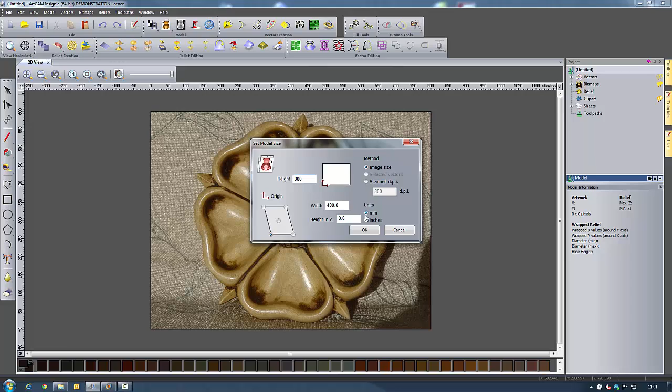So I'm going to go straight over to ArtCAM now, and I'm going to simply drag and drop an image into ArtCAM. I'm going to resize it so it's half the height and width that it was previously, just so it's more manageable, and I've got the origin in the bottom left hand corner, and I'm going to be working in millimeters there. So I'll say OK to that.

You can see that we've got a colour palette down at the bottom with all of these colours making up this one image. Now I'm going to turn the transparency down to start with so it's nice and low, because I'm going to be using this image just as a background so I can start drawing my own vectors from it. I'm going to start by creating the centre of this flower by using a simple circle vector from my vector creation toolbar on the left hand side.

I'm simply going to start in the middle where the cursor changes and drag out a circle. Just zoom in there so you can see that clearly. Now I'm going to input a specific value, radius of 36 millimeters, and say create. Close that down. If I zoom in now, I can actually just tweak the position so it's precisely over the middle of my flower.

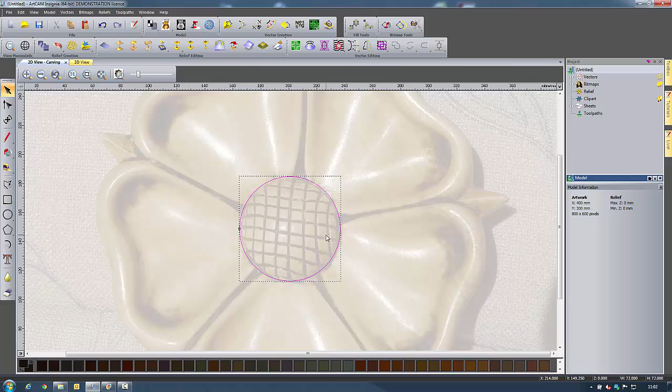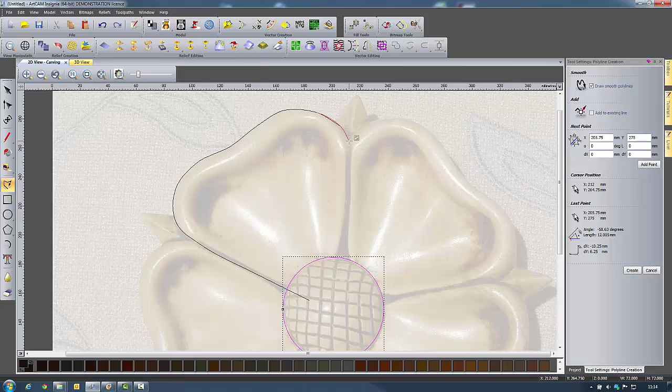Now I want to start creating the vectors for one of my petals. So I'm going to zoom in slightly. I'm going to go to my polyline tool. I'm going to draw smooth polylines. I'm going to start inside the centre of this circle. So we're going to be creating the petal that goes into that circle, and I'm simply going to click around my petal like so, we can trace around that shape. Again, extending into that circle, spacebar to finish.

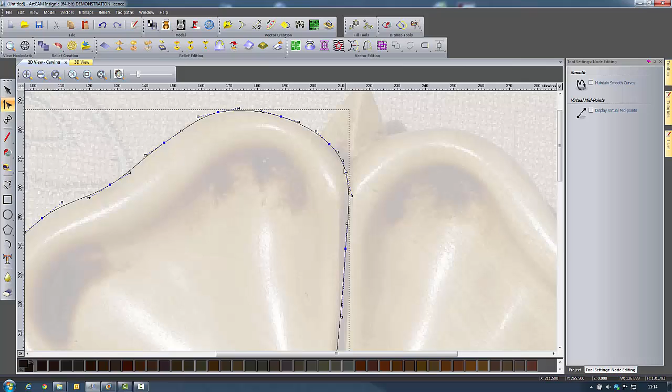If you're not happy with exactly how your vector was created, you can enter node editing and then zoom in and then tweak some of your nodes like so. I'm pretty happy with that. But what I'm going to be using this for is the 2-rail sweep tool, and that means we can't have this dip in the middle here because that's going to be one end of our drive rails. So I'm just going to hover over this node here, press D on the keyboard to delete it. I can also manipulate this one around a little bit as well.

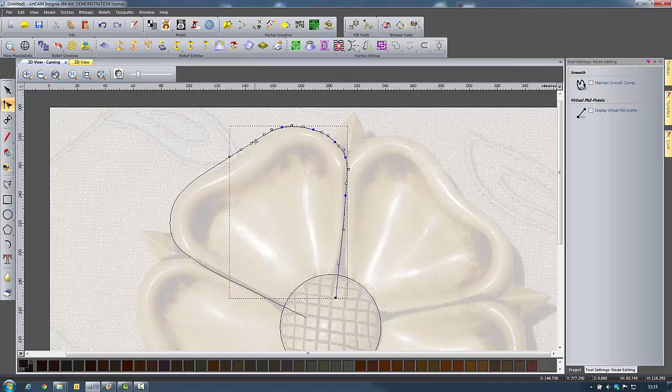So now what I'm going to do is cut these vectors in the middle. So we'll find the middle roughly, hover over and press C on the keyboard, and that means we now have 2 vectors created. So I'm going to exit the node editing mode. I want to create copies of these 2 vectors. So I can shift select them both. I'm going to enter the transform tool, and I want to rotate to copy them around my model, like so.

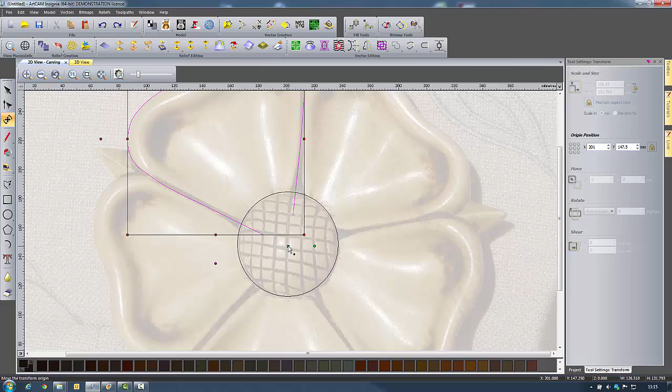Now at the moment, if I just twizzle that around, you can see the pivot point is in the centre of those 2 vectors. So I'm going to undo that, go back to my transform tool, and I'm going to move that pivot point and snap it to my circle centre. You see how it snaps there? My cursor changes and it's in the centre. So now I can create copies. I can hold down my control key to drag out a copy like so. And again, I'm going to create multiple copies so we have petals going all the way around my model.

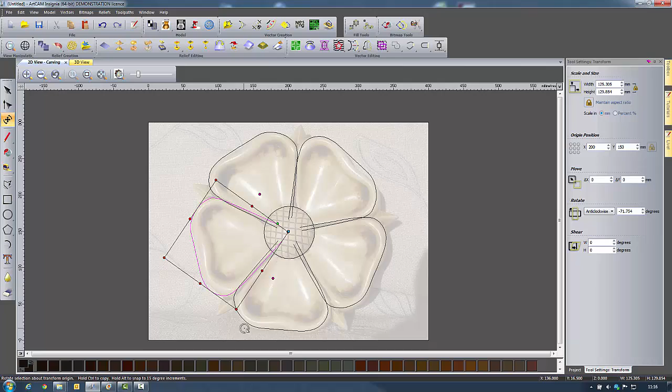Like so. So now I've done this, like I said, I'm going to be using 2-rail sweep, so we need to have cross sections in there. So I'm going to create these next. I'm going to start by creating just a simple rectangle. I'm going to zoom into a blank area of my model. I'm going to create a nice long thin rectangle like so. Say create, and then we'll close that down.

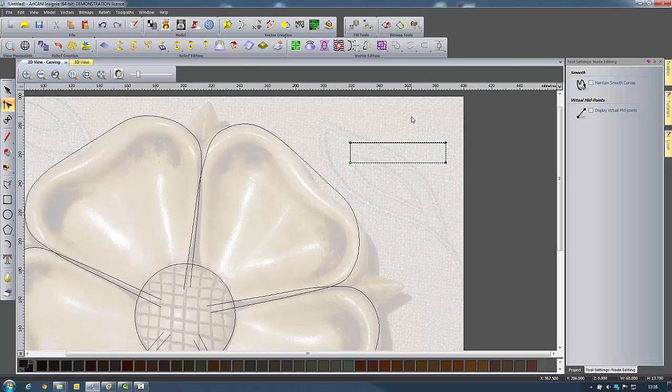I'm going to enter node editing. So we can do that by pressing N on the keyboard, hover over these two nodes, and we'll smooth those out like so. Now I'm going to move them inwards slightly, so we've got a nice straight span up there.

We'll also tuck these in a little bit as well. Now I'm going to enter a midpoint, so I can do this by hovering over and pressing M on the keyboard. I'm going to select this guy and move it down manually. Since I've got something that looks a bit like this and I'm happy, I can then cut this vector, so I can press C and C, and delete this span.

I'm going to go back to normal mode and create a copy of this vector in order to create my second cross section. So I'm going to drag out a copy like so, go back to node editing, so N on the keyboard. I'm going to add a couple more midpoints in, pressing M, and I'm going to grab all three of these middle points and drag them down.

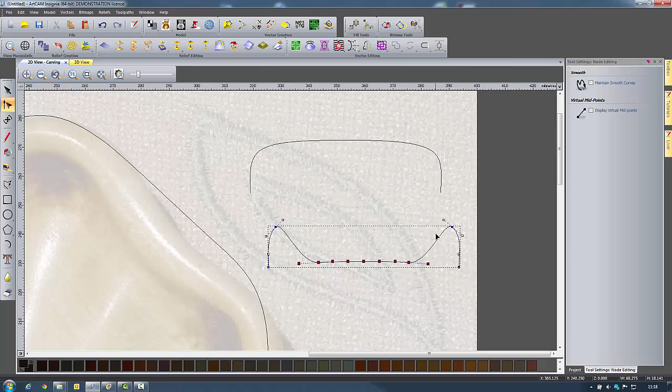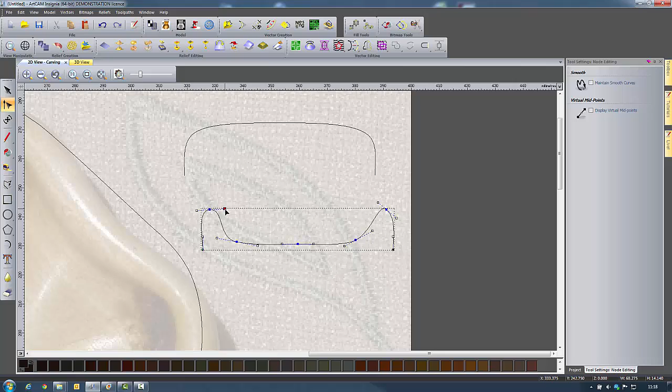Okay, so what I'm doing here, if I just bring the transparency back, is trying to create these two shapes in here. So we've got a nice bulbous end, but we've got a dip shape in the middle. And obviously I'm just using it as a guide. So I'm going to manipulate my nodes so I get the shape that I want. We've got some nice round tops there. And once you've got something that looks a bit like that, that's going to be okay.

The reason I started by creating a rectangle is so these are going to be on a horizontal plane. So I could have used a guide as well. So you see that, like so.

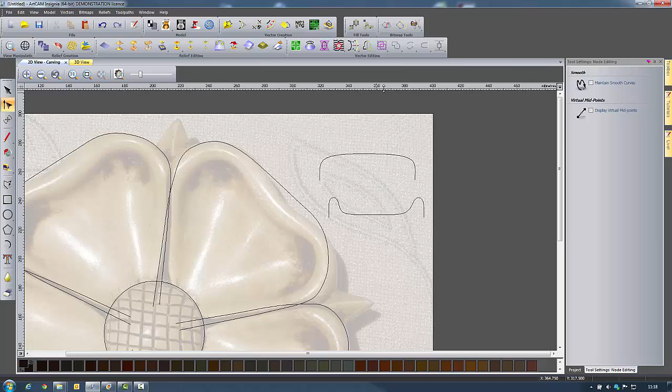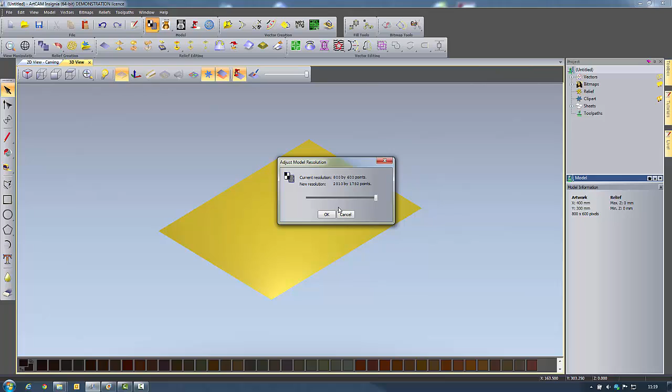So before I start creating my relief by using the 2 rail sweep functionality, I'm going to increase my resolution. So I can do this by holding down this icon here, and we can see we've got a current resolution of 800 by 600 points. I'm going to drag that up to as high as my machine can handle, so that's all the way up to the top, and that's going to give you a better quality relief. We get this warning, are you sure you wish to continue? Yes.

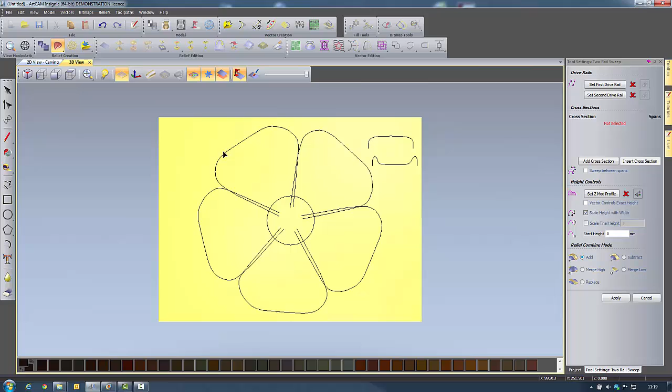I'm in the 3D view, show my vectors. I'm going to view from the top, and I'm going to open up the 2 rail sweep tool, which is this top one here. So it's asking me to set a first drive rail, second drive rail, and then some cross sections. So I'm going to work on my first petal first of all. I can select this vector and set it as my first drive rail, this vector as my second drive rail, and then we can have our cross sections. So I'm going to start with this guy.

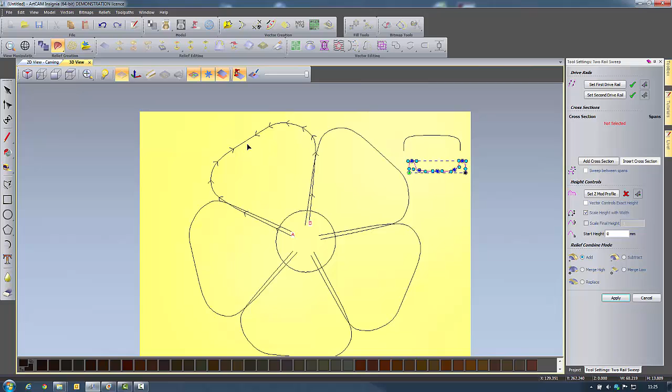And when I click away, you can see that the flow of my vector is going all the way around. So I'm going to reverse my second drive rail, like so, in order to create the start profile here and then the end profile here. So here's my start profile, and I'm going to say add, select my end profile and say add, and then it will get added at the end.

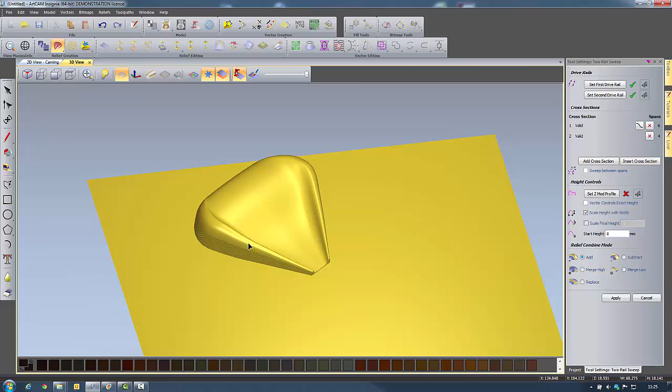We can inspect this relief if we want to. I'll turn the vector visibility off, and we've got a nice looking shape here. But it's not exactly what we want. We want to have more of a bowl-like shape in here and then a bulbous end. So we'll view from the top and show our vector visibility again.

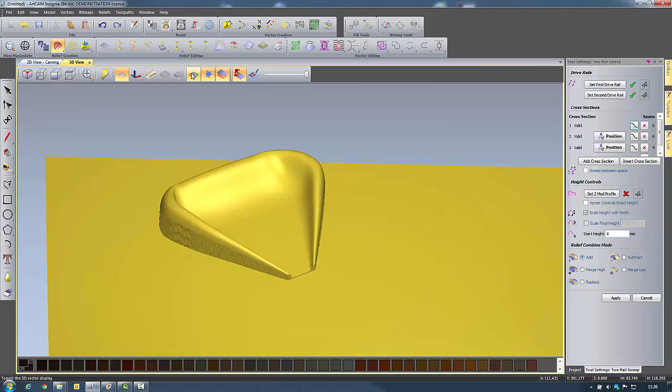I'm going to select my first cross section again and insert cross section, and now I have to input 2 points on my first drive rail, then my second drive rail. It's just a position, and you can see how that updates and changes our relief. So now I'm going to select my second cross section. We'll insert, and then we're just going to do 2 clicks right at the end, and again you can see how that affects our relief. So I'll toggle vector visibility off, and we can inspect that.

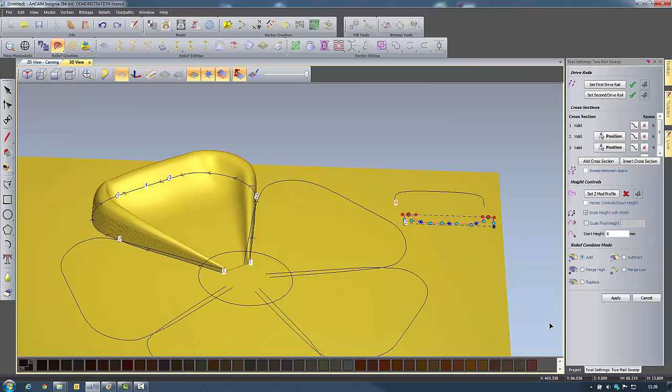If I bring it back on, you can see that we might want to reduce the height of these lips here, and we can actually do that interactively. So if I select my first cross section, I can select these high nodes here and simply move them down, and you can see we've got an update there, and that looks much better. Now I'm going to say add and apply, and we'll close that down. View from the top, turn our vector visibility off, inspect your petal.

Once you're happy with everything that you've got, you can start creating the rest of your petals. So I'm going to do that now. I've just lost my project panel here, which is probably quite useful. So if you do close that down by accident, you can bring it back by right-clicking in this dark grey area here, and then bringing back the project panel like so. And we're going to need this later on. We've got our vector layers, bitmap layers in there, and our reliefs and clip arts and whatnot.

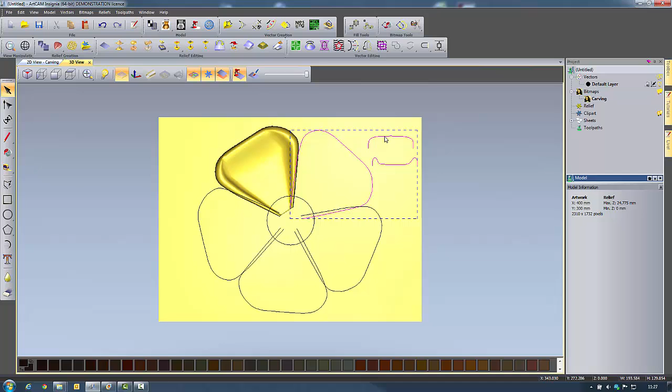So I'm going to create my next 2-rail sweep, and I'm going to do this slightly differently but quicker. I'm going to click on my first drive rail, hold down my shift key, second drive rail. Then I need to shift select my 2 cross sections in the correct order, and you can see our relief is created. Now because we haven't reversed our second drive rail yet, our relief looks quite strange, so we can just reverse that and then we get the design that we're after.

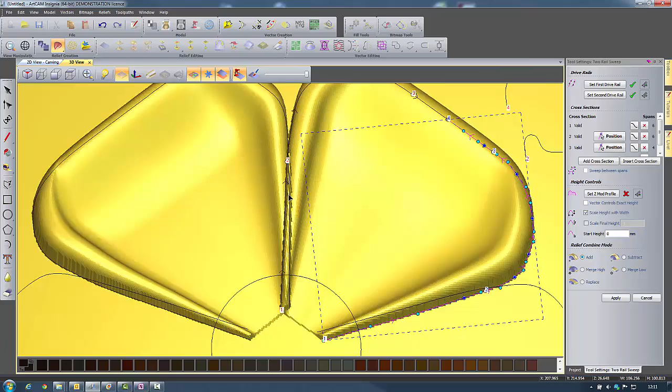So I view from the top, and now I want to insert my 2 cross sections. And one at the end there. And once you're happy, you can zoom in, inspect your relief. You can see that we've got this funny looking lip here, if I just hide my vectors. And that's because we've got add as the combine mode. So what we want to change it to is merge high. And you can see that blends those 2 reliefs in nicely together, and then we can say apply, and we'll close that down.

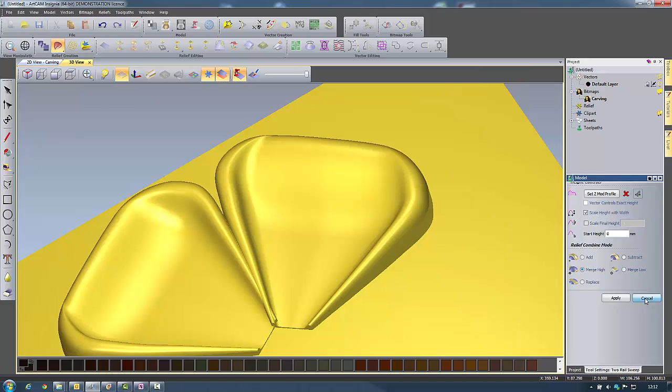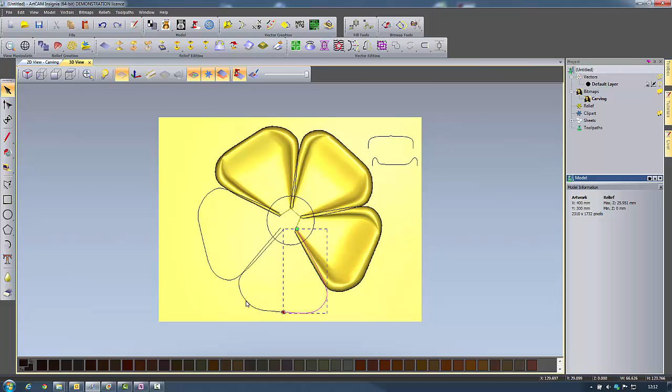So now I want to create the other 2 very quickly. I can simply, first of all, select all of the second vectors and then right click and reverse vectors, and that means I'm not going to have to reverse them inside the 2-rail sweep tool. Now I'm just going to select them all in order, open up the 2-rail sweep tool, and then input my cross sections. So when you've done that, you can inspect your petals.

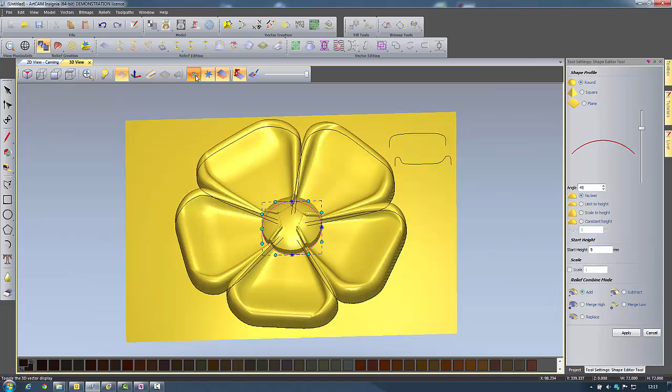But next what we want to do is create a shape for the middle of our flower. So I'm going to open up the shape editor. I want to create a round shape with a start height of 9 millimeters. And if I zoom in again and inspect, you can see that we've got add as our combine mode, and that's the undesired effect. So if I change that to merge high, you can see that all blends in nicely, and we can say apply and close that down.

Now the next thing I want to do is add a texture on top of my flower. If I go back to my 2D view, you can see that we've got a nice texture there where the seeds would be in the flower. Go back to my 3D, turn my vector layers on. You can see that I've got the circle vector selected, and then I can simply go to texture relief. I want to create a texture inside the selected vector. I want a pyramid shape and a sizing of 5 millimeters, and then we'll just say add. And you can see that's added inside that selected vector, and close.

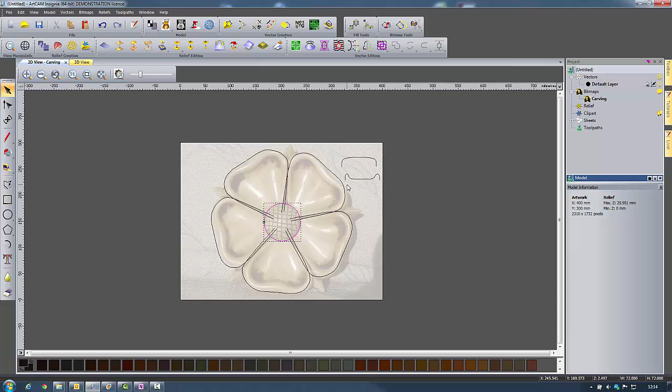The next thing that I want to do is create the leaves. So we go back to our 2D image, turn up the transparency, where you can see we've got these leaves up here, just to complete the flower. So back on the 3D view, I'm going to create a new vector layer for these leaf vectors, and I'm going to rename it leaf and apply. So I can turn the visibility of default layer off, and then I'm going to create a polyline.

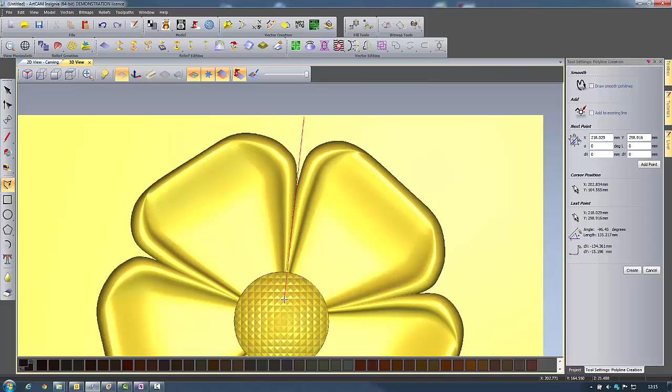So I want to create a straight polyline. I'll zoom into this top area here, and I want to draw a straight line down the middle going straight into that circle vector. Spacebar to finish your line, and then I can just create another one. So if I turn on the visibility of my image in this 3D view, I can use it as a guide to creating these points here. So I'm making a sort of kite shape.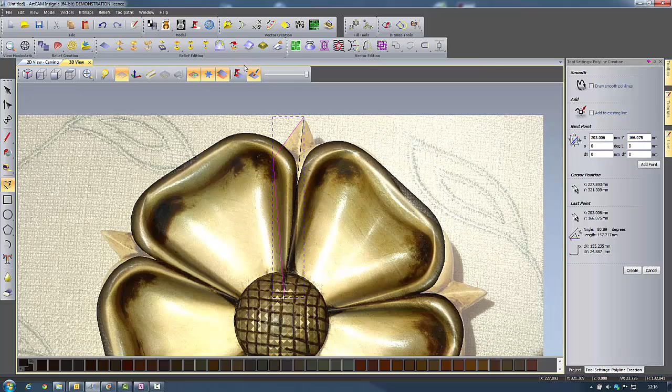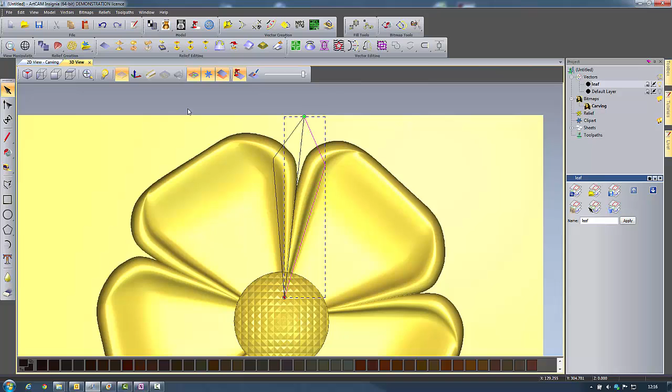Spacebar to finish. Again, you can turn the transparency all the way down, or just toggle back onto the modelling colour. Now I'm going to mirror this vector over this line, so I can shift select the line, mirror vector in selected line, like so. Once I've done that, I'm going to have to create another 4 copies of it. So I'm going to do this the same way I did the petal originally.

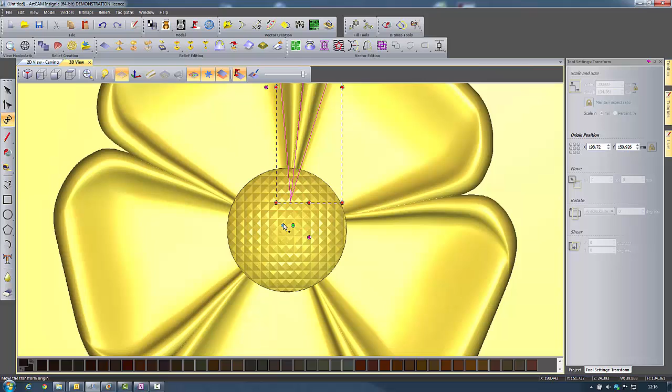Go into my transform tool. I can snap the pivot point to the centre of my circle. Might be easier if I'm a bit more zoomed in there. You can see my cursor changes when I get to the middle of my circle. And then I'm going to hold down my control key and simply create a copy there. And again.

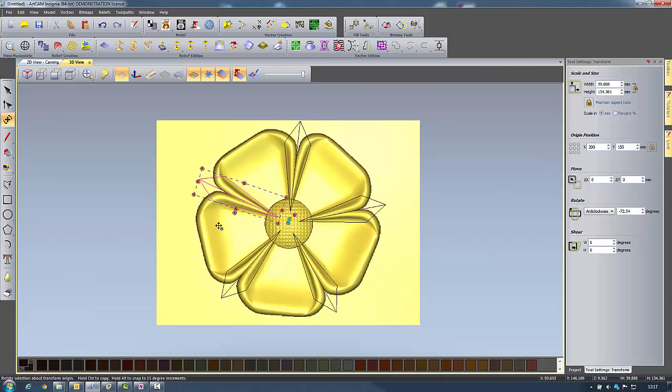And now I've got 5 of those leaf shapes. So I'm going to do this by creating a 2-rail sweep again, so I need to have 2 cross sections.

I'm going to create a polygon, a triangle actually, which is a polygon with 3 sides, and say create. Then I'll go into node editing by pressing N on the keyboard, and cut out this bottom section by hovering over the node and pressing C. Then I can simply move that straight span down, like so. So these are my 2 cross sections.

I'm going to go into my 2-rail sweep tool. I can set my first drive rail, my second drive rail. You can see that the vectors are flowing in the correct direction. This is the start where I want my point to be, so I can select my triangle point and say add, then select my flat plane and add.

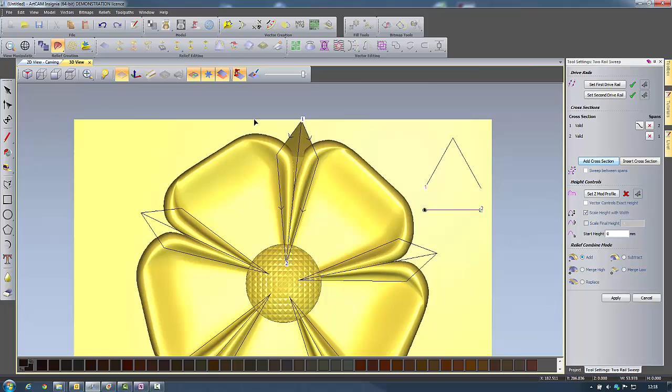Now I'm going to have to go in and add another cross section, as this is protruding too high up above my flower. So I'm going to insert a cross section and simply add one in there, and then I can turn my vectors off and inspect that. That's much better. So I'm going to say merge high and apply.

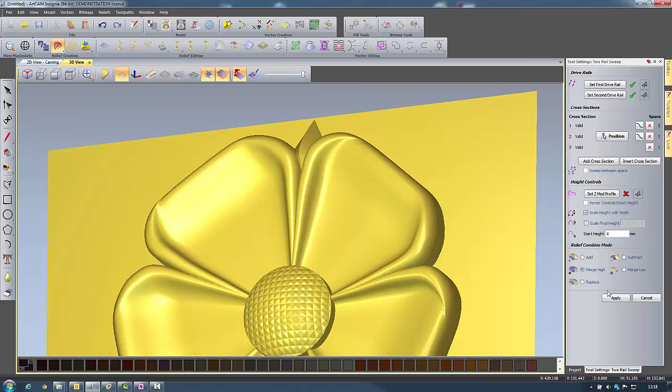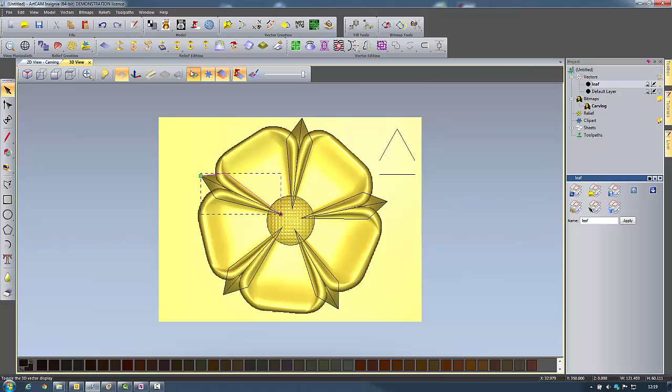Then I'm going to do this all around my model. So once I've done that, I'll turn the vector visibility off and you can have a look at your model. I'm happy with that.

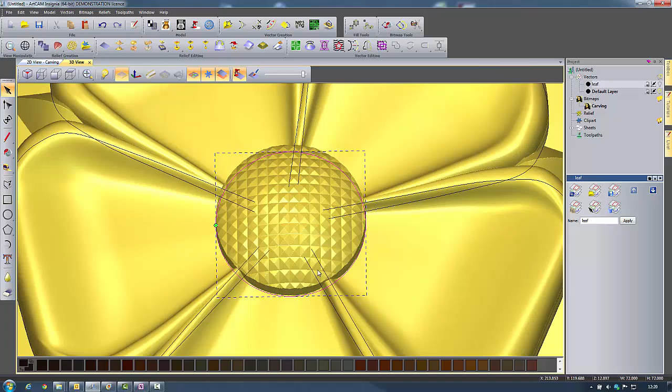There's just one thing I want to do now, and that's to smooth out my pyramid pattern that I created on that circle. So I'll bring my vectors back on, turn the vector layer for leaf off, turn the default layer back on, and select this circle and go to offset vectors because I want to smooth all the way past this circle.

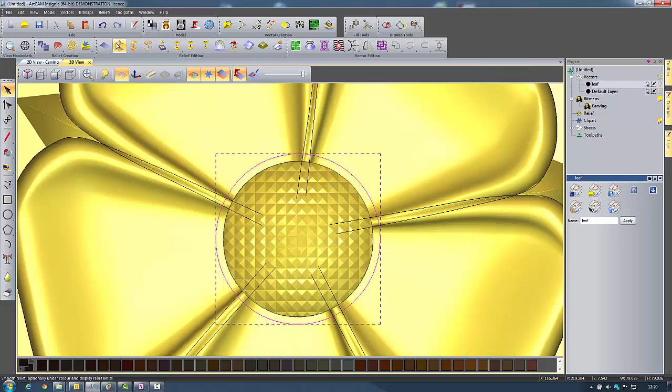Now I can simply view from the top and use interactive offsetting, so you can pull inwards or outwards, and I can just pull a few mil back there. Then I can smooth inside that selected vector, so I'll do smooth relief from our relief editing toolbar, and we can do a couple of smoothing passes there. So I've just done 2.

Once you've done that, I'm going to open up my clip art library and save my flower as clip art. So here I'm going to show you how we can create a new folder in here, and you can fill it with all of your own custom reliefs.

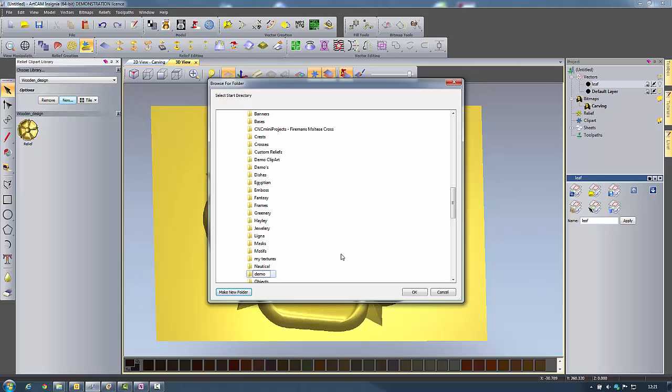So we can say new. If we go down to reliefs, you get all of the model libraries here. I can make a new folder and call it, I'll just call it demo for now. And then I'll say OK.

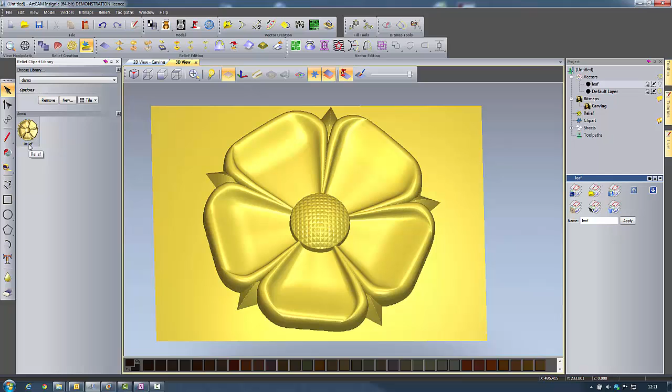You can see that we've got an empty library or an empty folder, and I can simply drag my relief across and drop it into that folder, and there we have our relief, and you can rename it if you wish. So now once I've done this, I can actually close my model down, and I don't need to save it because I've saved my relief, and that will be stored as a .rlf file.

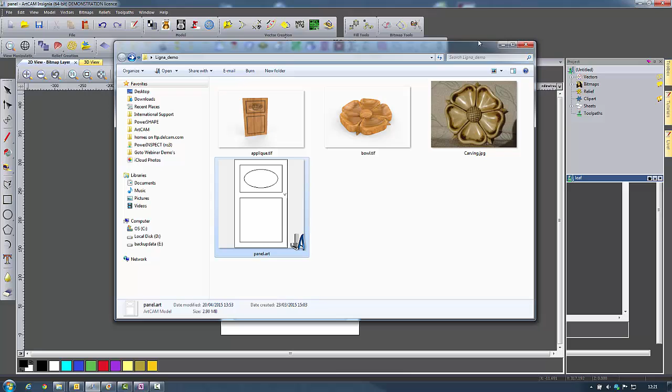Now what I have created earlier is this panel.art. It's an ArtCAM file where I've already created the vectors, because I've already covered vector creation in this tutorial. So now I want to demonstrate the Extrude tool. What we have here are a couple of drive rails, or what we're going to use as drive rails. They are just vectors, and here is what's going to be my cross section.

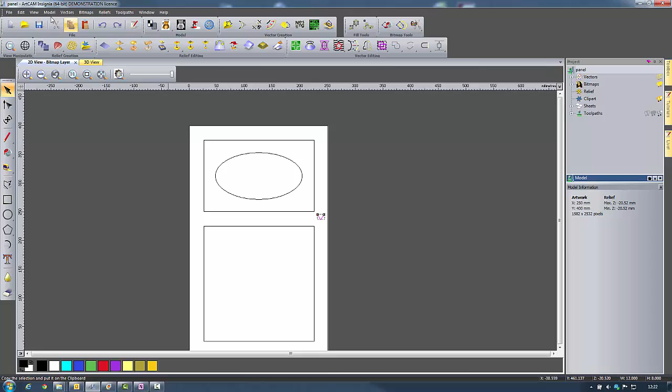So I'm going to open up my Extrude tool. If I just hold down, it's the second one down, and the other options we have are spin and turn.

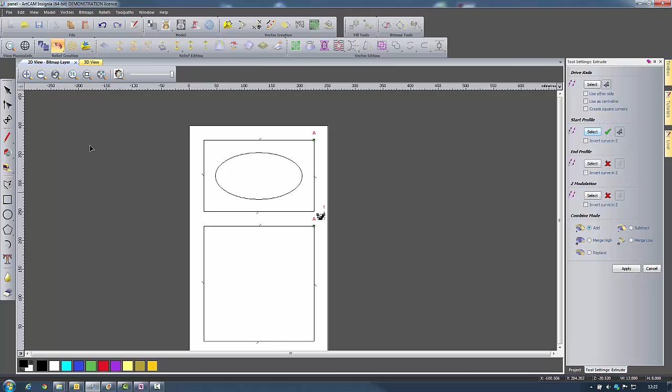So if we open up Extrude, I can select my two rectangle vectors and set them as my drive rail, and then I can select my cross section and set it as the start profile. Now if I go over to my 3D view, you can see what shape we have created here. So that's not exactly what I wanted for my panels.

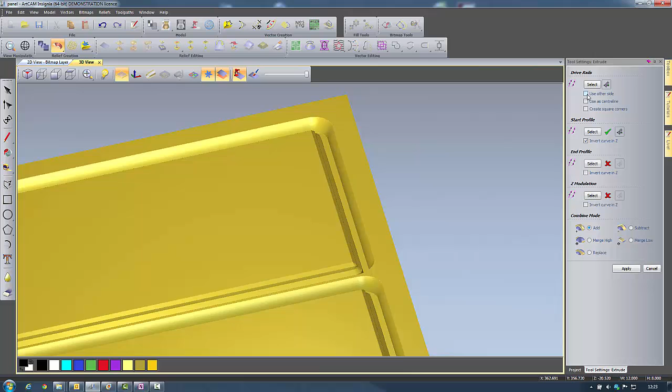I actually want to subtract that shape rather than create a positive cross section. So I'm going to invert in Z, and you can see now that cross section is subtracted away from my zero plane, and I also want to use other side. You can see it jumps to the other side and gives us these nice square edges. So I can say apply and close that down.

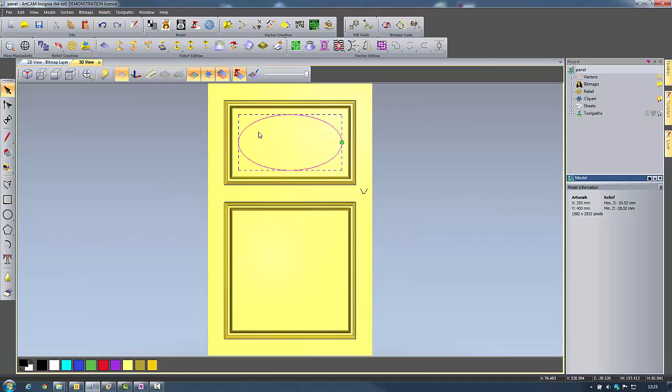So the next thing I want to do is create a dome shape from this ellipse, so create a concave shape, which is where I want to then place my patterns later on. So I'm going to double click this ellipse shape, and you can see that we'll get a dome already forming.

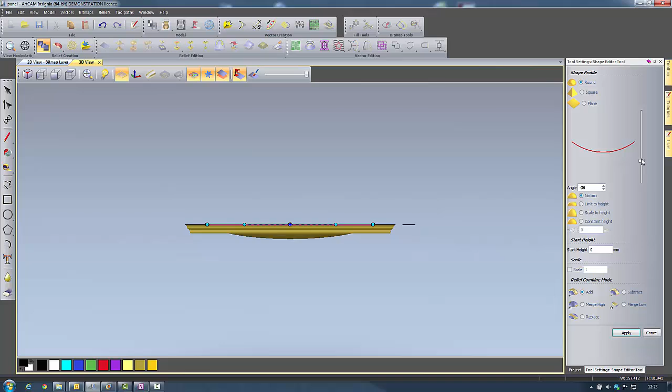I'm going to view from the front. I'm going to have add as my combine mode, and I'm going to simply pull it down until I get the sort of depth that I want. I actually want a depth of -40, so I can type that in. And I can investigate it now, so it's coming all the way down, but my material is going to be deeper than that, so that doesn't matter. And I can say apply and close that down.

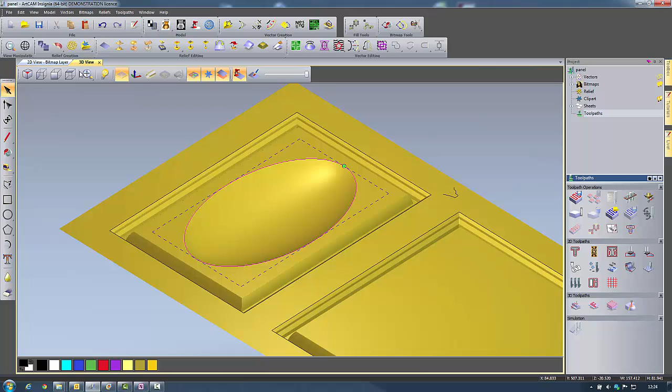So that's our recess ready for our pattern. So what this demonstration is going to show is how to create Toolpath templates, which is going to be really useful if you're creating many panels with different decorative designs on.

So I'm going to create a new vector layer now, and I'm going to call it machining vectors, like so, and I'm going to turn the default layer off.

So I want to create some vectors which encompass all of my relief, so I can do this by creating a boundary from relief. We can use a height range with a max or min height, but I'm just going to create a boundary, a smooth boundary, around all of my relief. So if I now go over to my 2D view, you can see that we've encompassed all of our extrude and all of our concave shape.

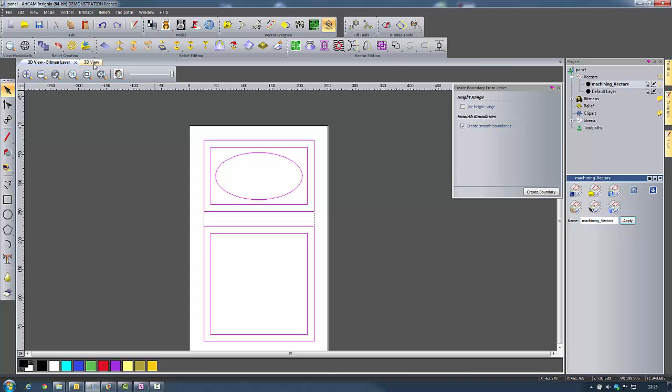I'm going to use these vectors, I'm going to keep them selected, to create my toolpaths to machine this design. So I can click on toolpaths from my project panel. I'm going to create a 3D machine relief toolpath.

We're going to have a 5mm end mill as our roughing toolpath, and a 0.5mm ball nose as our finishing toolpath. And I'm also going to put an angle of 45 degrees in there. So that's not changing the angle that the tool is machining, but it's actually rotating the entire toolpath.

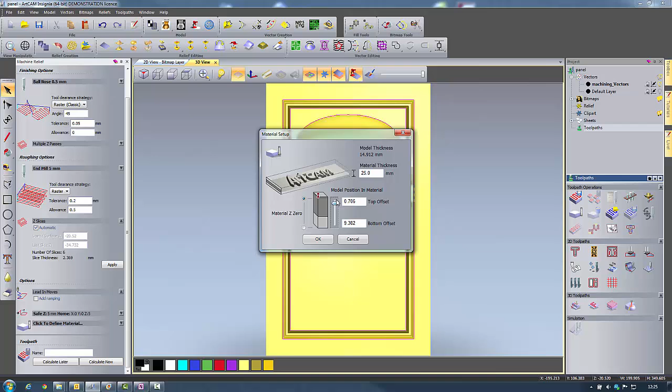Now I want to set up my material. I'm going to set it to have a material depth of 25mm, and we want to have our model at the top of the block. So we'll say OK. So you can see we've got a representation there of our material, and I can say calculate now.

So you can see what's happening here is I'm creating a toolpath over my entire piece of material. So I've missed out a step.

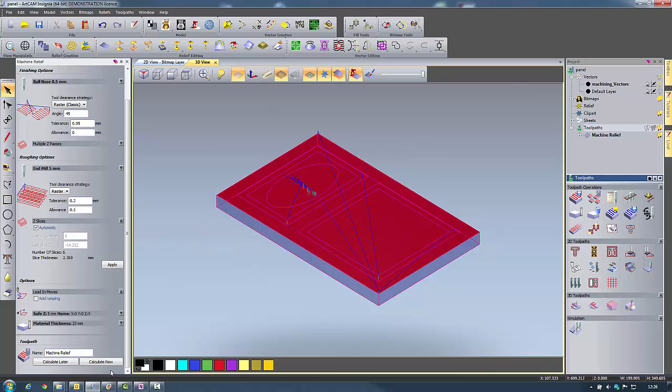I'm going to go back up to the top and choose to machine inside selected vectors. I'm going to choose inside or outside vector. Obviously I'm going to choose inside, and then I'm going to recalculate. So it's okay if you do make a mistake.

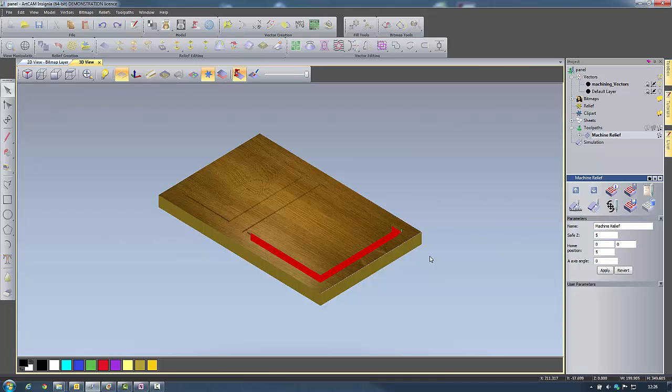Now you can see that I've done the correct machining. I'm machining inside my vectors, and I can close that down and simulate my toolpath. There's our roughing, and there's our 0.5mm finishing ball nose. And you can see it's going in at 45 degrees.

Okay, so here's our panel. I've got medium oak set up as my material colour in my simulation.

So now I've got a blank canvas or a blank template, and I can save these toolpaths, and then I can create a design on my panel.

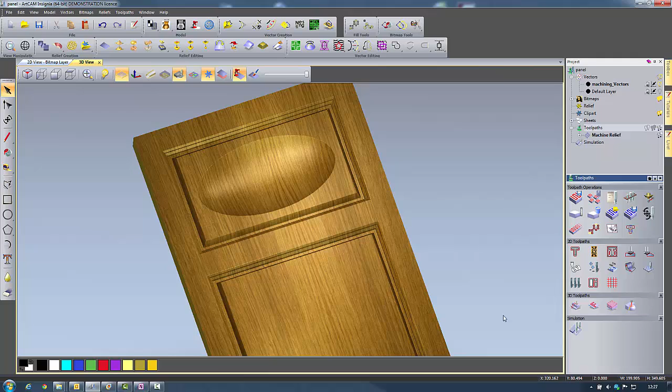So I'm going to go to Toolpaths, and we've got this icon here, and we can save Toolpaths as a template. So I'm going to select that. I'm going to just call it panel, and that's going to save as a .tpl file, and we'll say save. So now I've done this, I can actually just delete my toolpaths.

I'll delete my simulation, and if I just turn the backplane off, you'll see the relief that we've actually created.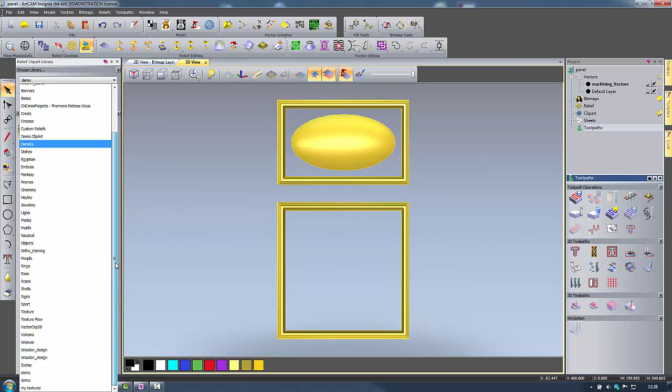So I want to create a custom pattern in here. I'm going to open up my clip art library. You can see I can navigate to my folder called demo, and I can simply select that flower that I created earlier, and it comes in as clip art.

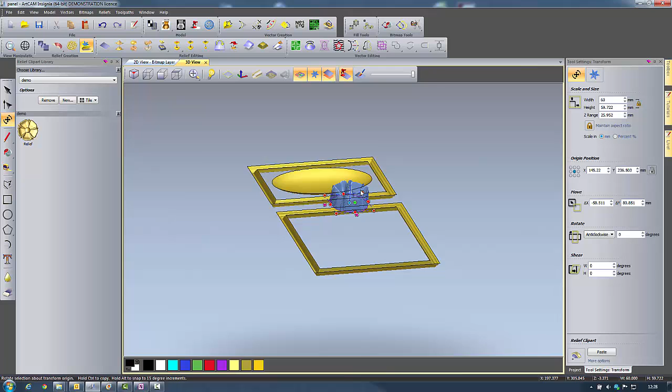We can move that around and paste it wherever we want. So here's our transform settings. We can set a width and a height. I'm going to set the width to be 60, and I've got aspect ratio maintained, so our height will adjust. I'll say apply. If I just rotate that round, we've got quite a silly Z height there, so I can set that to be 8 millimeters and say apply.

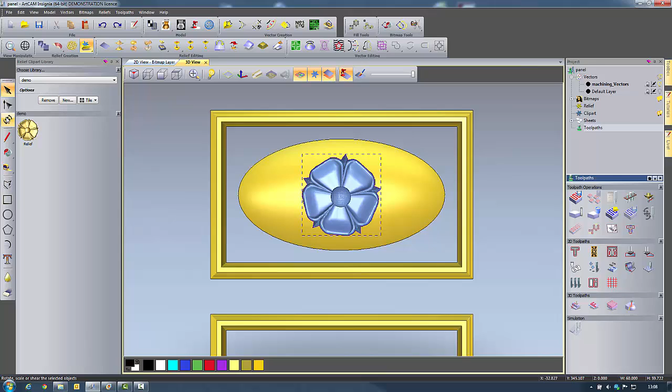I'll just view from the top, and I want to center the clip art inside my ellipse vector, like so. Now I just want to make a slight adjustment to my flower. As you can see, it's not sat quite square, so I'm going to go back into my transform tool and then just rotate anti-clockwise 5 degrees and say apply.

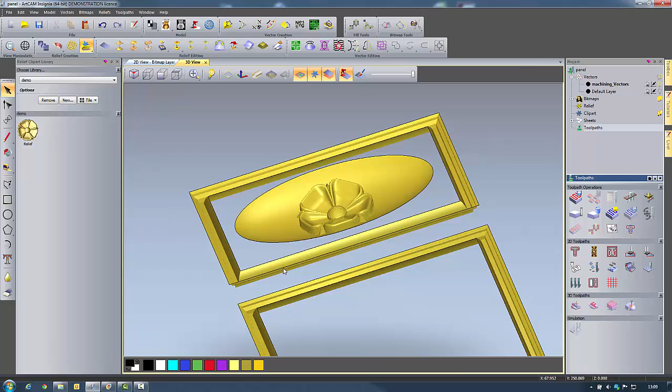And now I've done this, I'm ready to paste it down. So I can go over to my combine mode settings. I want to make sure I'm adding to my dome and say paste. When I do this, you can see that the flower is wrapped onto my concave dome shape.

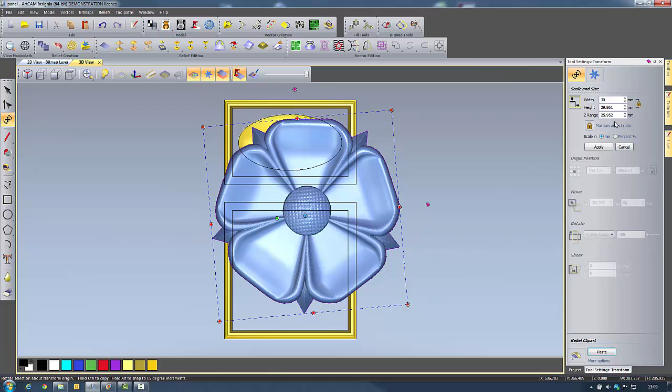Now I want to complete the design with 2 more flowers. I'm just going to view from the top, select my flower clip art again. You can see we get the clip art shown in blue. Again, I'm going to have to square up my flower, but this time I want to turn it upside down, so I can rotate 185 degrees anti-clockwise and apply, like so. I'm going to change the width to be 30 millimeters, and I'll set the Z range to be 5 millimeters.

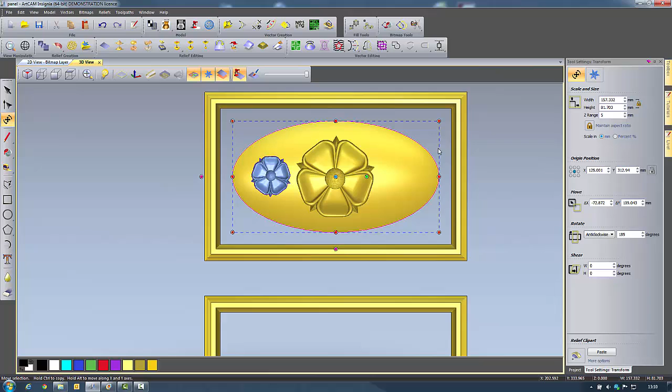When I've done this, I can position this flower over somewhere in the ellipse like so. And then to make sure it's in the correct position vertically, I can shift select my ellipse and then center vertically, like so, and it just drops down into place. Now I'm just going to use the arrow keys to nudge into a better location, and then I can mirror that clip art across the model, like so.

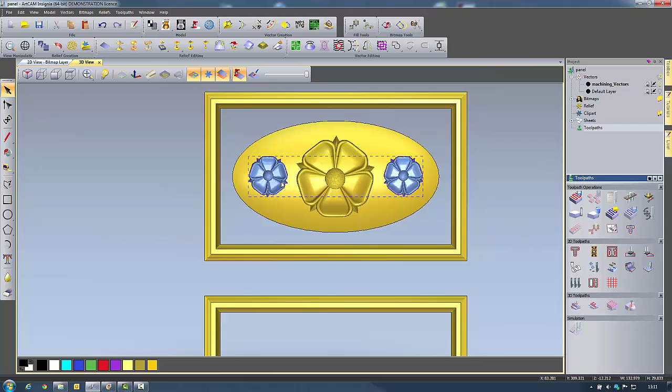So I've got 2 of those. Then I can simply select both of them, go to my transform tool and paste. You can see that they're wrapped onto that concave dome. Again, if I view from the front, you see that my flower design isn't protruding above my panel.

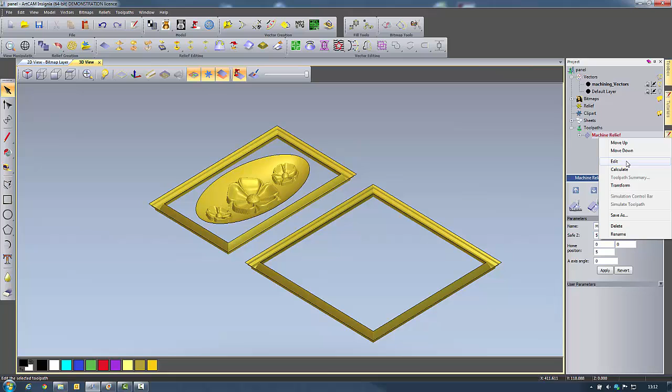So now I want to create the toolpaths for this design. Now I already created the toolpaths that I wanted, so I can open up the toolpath template that I saved earlier. You can see that it shows in red in my toolpaths panel. That means it's not being calculated yet. So I can right click and calculate.

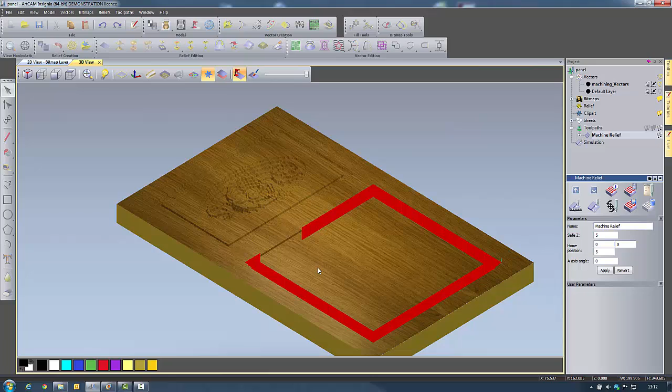You can see my toolpaths are calculated there, and then I can do a simulation. So there was my roughing, and here's my 45-degree finishing toolpath. And we've not had to individually create our toolpath. All we've done is load our toolpath template that we saved earlier. And you can see we've now created a simulation of what our toolpath is going to do.

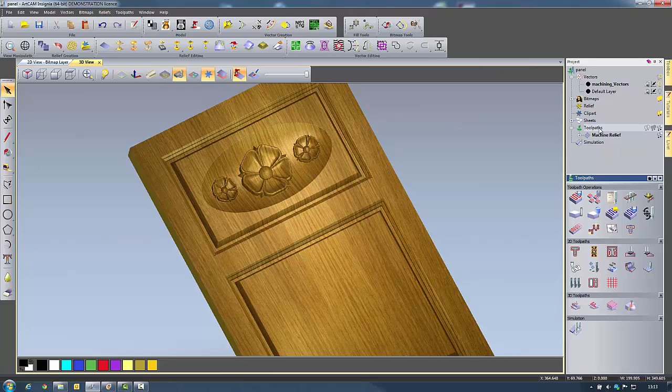So what we need to do now is save and export our toolpaths as NC code. So to do this, we click on toolpaths. We can say save toolpaths. I'm going to assume I've got a manual tool changer, so I'm going to select the correct post processor. Then I can choose to save toolpaths to separate files and append toolpath details to file names in order so I know which toolpath to run on the machine in which order.

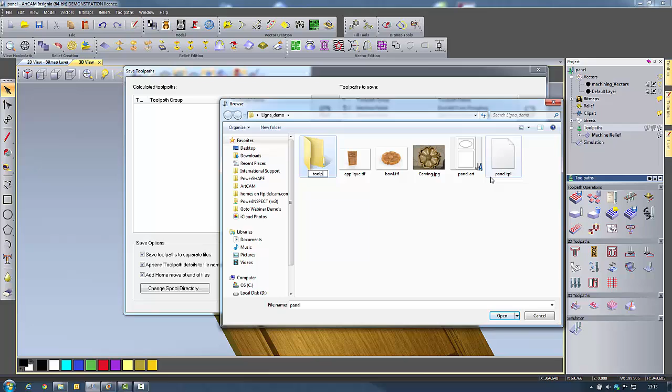I can choose a location. I'm going to create a new folder in here called Toolpaths, and we'll just call them panel and say open. When I hit save, our toolpaths are created. So if I navigate to that folder, you can see we've got this new folder now called Toolpaths.

I can open that up and we've got 2 tap files. If I open one of these, here's our NC code. And if we look at the name of that toolpath, you can see that it's Toolpath 1, Machine Relief, End Mill, 5mm roughing. So I know exactly what tool to use and what that toolpath is going to do.

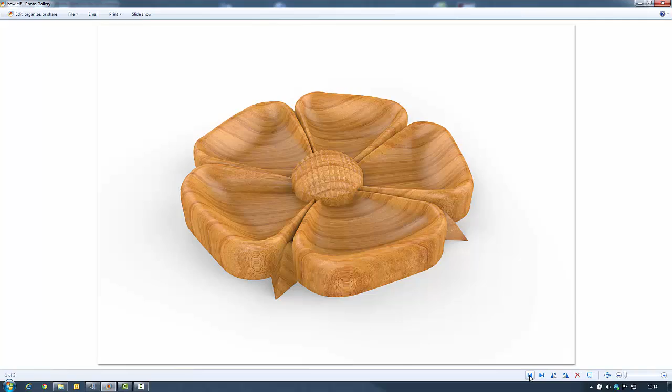This demonstration was to show you how we could create this wooden flower and then turn it into an applique using clip art. And in there we used the 2-rail sweep, we used Extrude functionality, and we also used Toolpath Templates.